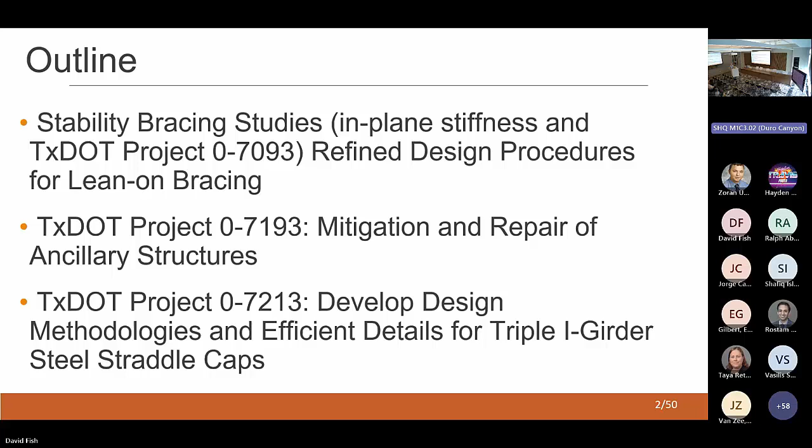And really want to commend David. This is an outstanding program today. I'm really kind of excited about a lot of it. Unfortunately, I've got to miss the rest of the morning because the university expects me to teach. They just don't have their priorities straight.

But anyway, so, okay, to talk a little bit, I'm going to talk first about some recent and ongoing studies we've got on stability bracing provisions. I really want to call out David Fish as well as Aiden, who's down here in the front, who've been heavily involved in both of these studies.

When we start to look at this, the upcoming 10th edition has got stability bracing provisions in it. Some of that may be new to some of you, but it's work that's been around for a very long time.

When we start talking about what we have to design for stability bracing, we find out that the stiffness is a function of 3 different components: the stiffness of our brace itself, like the cross frame, the in-plane stiffness, as well as cross-sectional distortion. And it's governed by the equations for springs in series, which, when you look at this, means the total system stiffness is smaller than the smallest of the individual components.

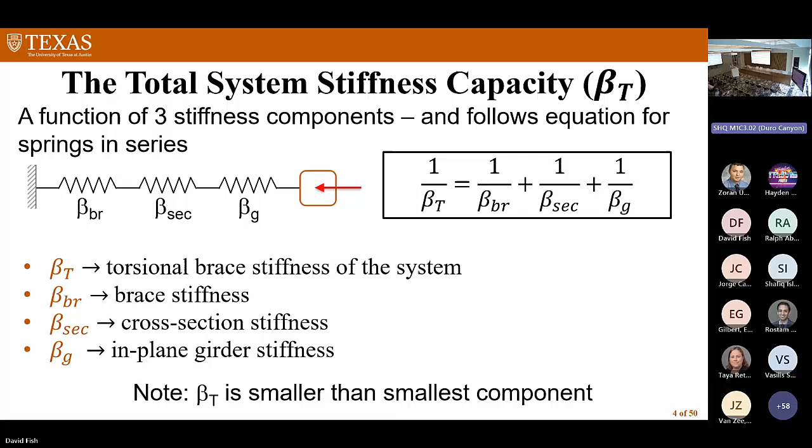So areas we've been working on a lot in the last few years are actually the stiffness of cross frames themselves, as well as the in-plane stiffness. We used to think we really knew what the in-plane or the brace stiffness was, and we did a study...

sponsored by TxDOT about maybe 7 or 8 years ago, I think, and we found out actually we don't know what we're doing very much there. We incorporated this thing we call an R factor that accounts for eccentric connections when we're using WTs or single angle type members. But generally, these stiffness equations work pretty well.

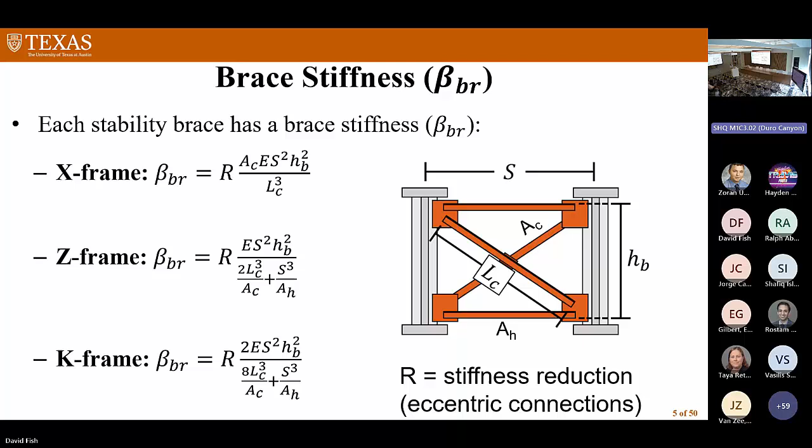The R factors that we have, we've kind of recommended values of a 35% reduction in the stiffness during construction. And then when we're evaluating fatigue and so on, we have about a 25% reduction. Those are things that have been in AASHTO Chapter 4 for some time. We are refining them a little bit.

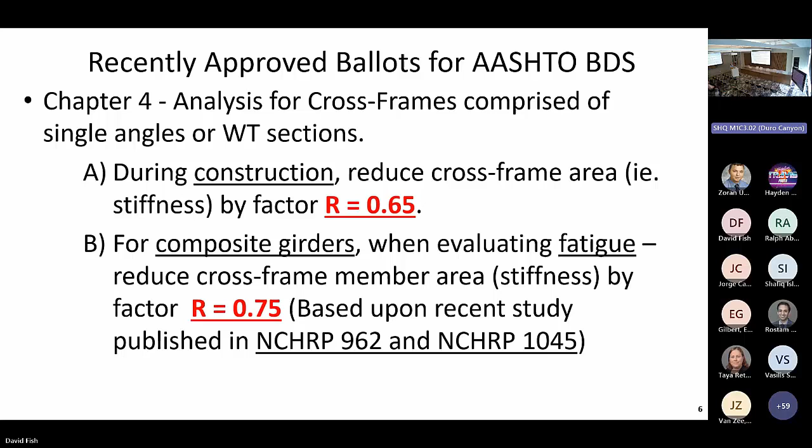Another thing we've been doing in this study with David and Aiden is understanding a lot more about the efficiency of some of these systems. It was a very detailed study we ended up doing.

We're recognizing cases that, a lot of times we go in, we've got a certain stiffness of a cross frame. So I've got the stiffness with a single cross frame — essentially what I have is a half a brace per girder. If I add another brace, another girder line, then I've got 2 braces, and what happens is I essentially go to 2/3 of a brace per girder. And then if I add another one, I get 3/4 of a brace per girder. If I get lots of girders, I go to 1 brace per girder.

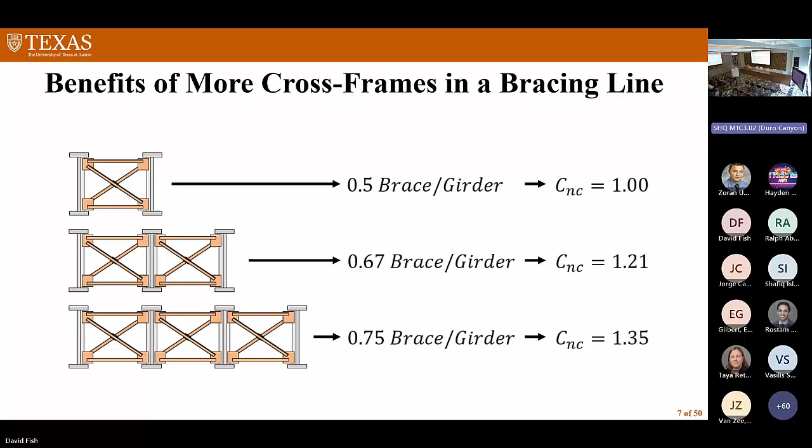So what happens is we're going to end up seeing that the CNC term here accounts for the improved efficiency of our different cross frame lines as we're adding some of those additional braces.

In the current edition of AASHTO—when I say current, I'm assuming the 10th edition is going to come out later this fall, we're hoping—we've got a term for beta G, which is the in-plane stiffness of our girders.

We discovered this back in the 1990s and came up with an equation. When we derived that expression, we did it for a single cross frame at mid-span, really for a twin girder system, and then expanded it to multiple girders. That recognized that the in-plane stiffness of the girders really impacts our behavior. What we're finding more recently is it can become unconservative in some cases as we get more bracing lines along the length. This is where David started doing some work when he came back and worked on his master's and got some nice expressions that we ended up coming up with.

Now, don't worry about the 10th edition provisions—they are conservative and work well, but we're going to be improving the behavior quite significantly in the 11th edition, which, at the rate we're going right now, is beyond about 5 years or something.

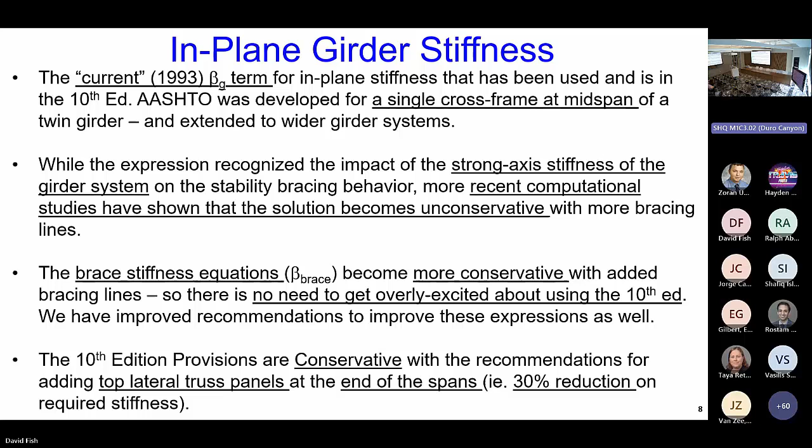Looking at what we did to come up with this, it was a very detailed and complicated study, because we had to isolate cross-frame stiffness from the in-plane stiffness. David ended up looking a lot at the in-plane stiffness effects through the system mode of buckling, and came up with some really nice solutions for those expressions.

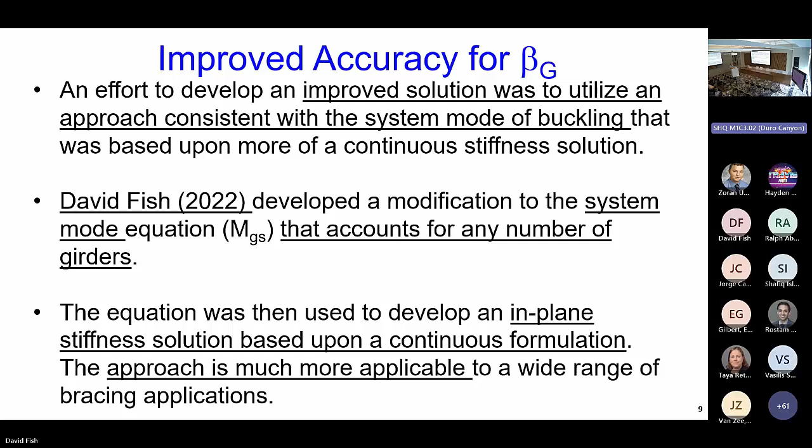So many of you are probably aware that back in 2008 or so, we ended up discovering the system mode, and we had to go tell all the bridges that this is a potential mode. We don't understand why we discovered this all of a sudden, and all of a sudden all these bridges started coming up with these problems.

This was the equation that we had derived back in 2008, and it was derived for a twin girder system. What David did is expand on this, and we've got some new terms in there that allow you to accurately predict the system buckling mode for systems with 2 girders, 3 girders, or 10 girders.

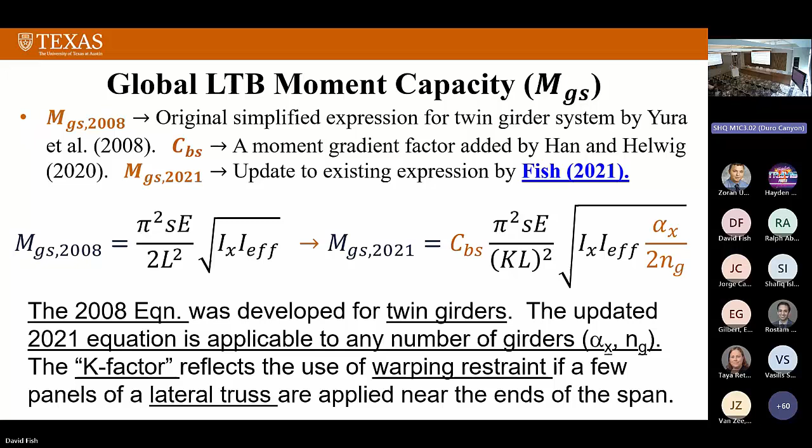Looking at that, we think it'll actually have a very significant improvement on what we can do from a design perspective. The other thing we end up doing is recognizing that the in-plane stiffness is closely tied to the system buckling mode.

So David went and derived this new equation shown right here, which has a lot more applicability to a wide range of problems and is relatively accurate. It's got the same things we have, like the alpha X here, that takes into account the warping stiffness of your girder system.

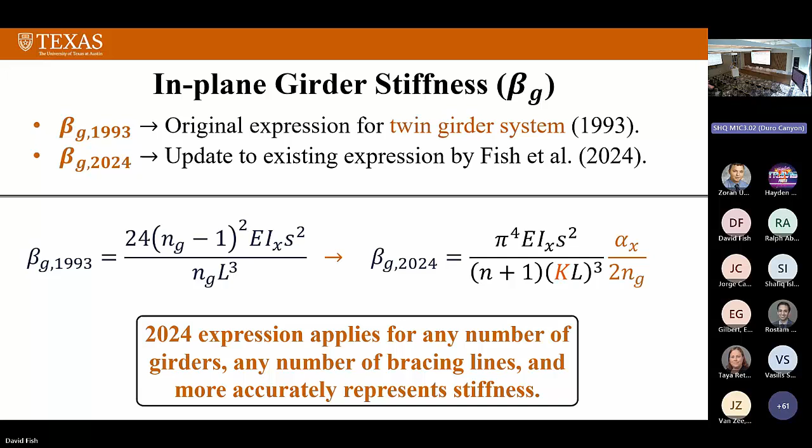Also, if you end up adding things like top flange lateral truss panels near the ends of your section, you can incorporate this K factor we've got here and use an effective length factor that captures the behavior much more accurately in our systems.

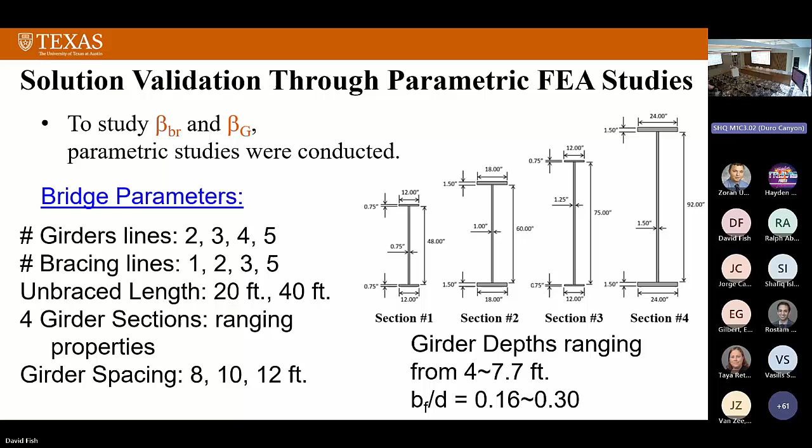We did some very significant parametric studies—this is what Hayden was working on, doing the FEA studies—lots and lots of systems, different girders, different numbers of girders, different geometries and so on, to really evaluate the accuracy of these provisions.

This shows a bit: if I look at the stiffness we end up getting on the vertical axis, normalized by what we call the ideal stiffness, versus the geometry—W over L of my bridge, the width versus the overall length—the equation we have from 1993 doesn't do a very good job. It looks like somebody took a shotgun and just shot at a target. Whereas the newer equation does a much, much better job—very significant improvements in accuracy from that expression.

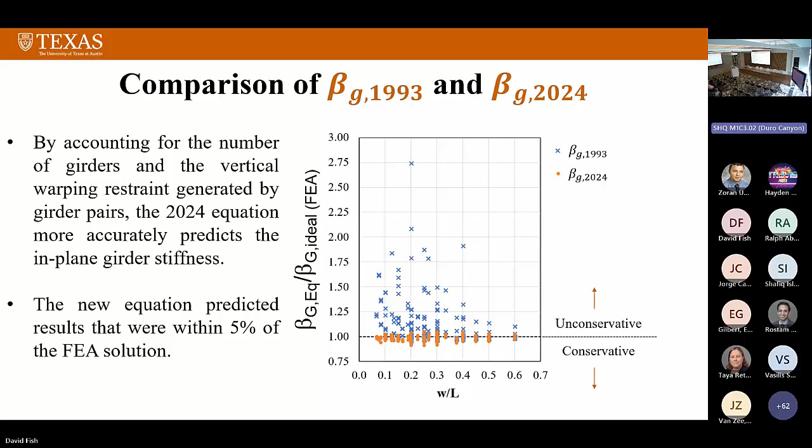Another study we're also working on involves those lateral trusses. We're not going to have you calculate a K, but say if you're using a couple panels of a lateral truss, you can design with a K factor of 0.7 or 0.75, something in that range.

That is a huge help because it's essentially on a term that's cubed. So if you use 0.7, you're looking at a very substantial improvement in behavior. And that 0.7 is in the denominator, so it's a big help for the overall stiffness of our system.

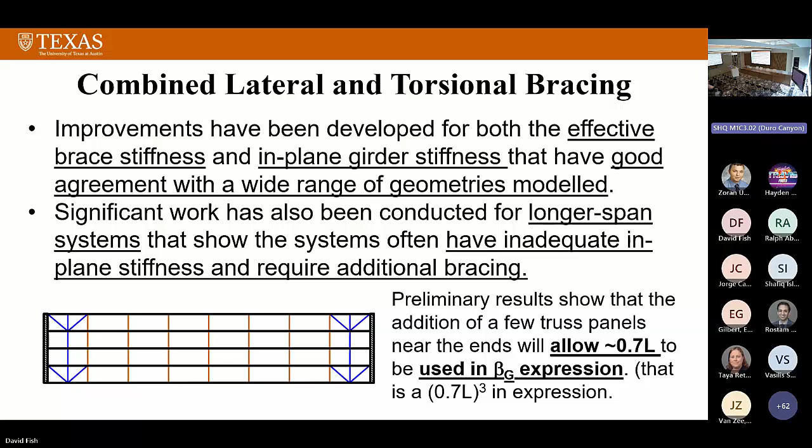Another study that actually finished last spring, but we're continuing to work on it. TxDOT found a few issues we had in our behavior. Hayden's been really going through that, doing a lot of work to refine our recommendations on lean-on bracing. I think we're all somewhat aware of the behavior of lean-on systems. We've used them in a few Texas bridges.

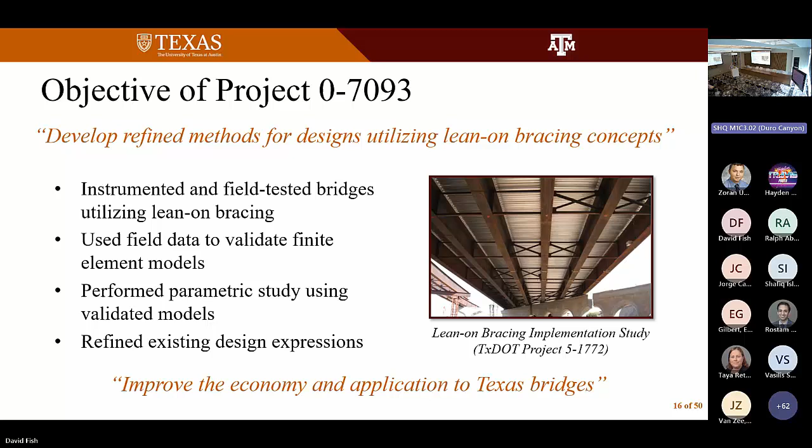I think I saw Michelle Ramage around here. She did some of her work on her master's back about 20 years ago. And we implemented this in a design she had done up in Lubbock on 3 different bridges, and really had some very good behavior on that. NSBA now has a new design guide on this that's out, with recommendations, and we're now refining our original behavior.

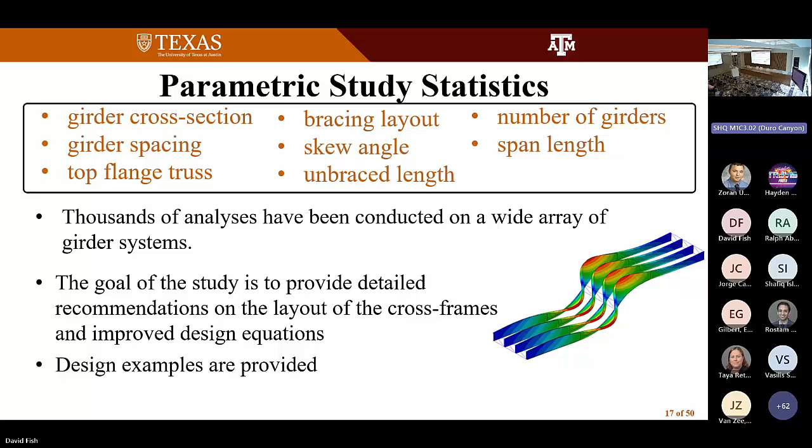So we're looking at some of the things we're studying, lots and lots of finite element analyses, parametric studies, looking at the wide range of systems that we end up having. The goal is to provide detailed recommendations to a designer so they don't have to be an expert in stability bracing to apply this material.

So we're kind of going through a lot of this and looking at it. We're looking at cases where you have normal layouts or skewed supports. TxDOT did that with a couple of bridges. Jamie Ferris was the design engineer for that. And when you get to skewed supports, the layout you use becomes something you need to understand the behavior on. So we're looking at a lot of different recommendations for systems with skewed supports.

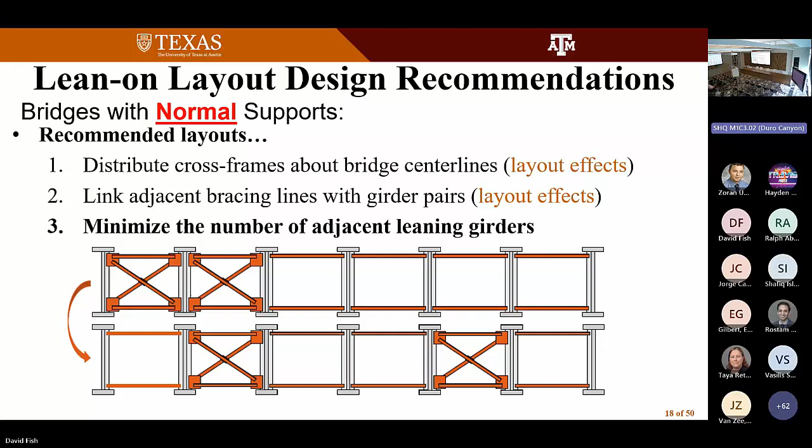If I have a choice between putting 2 cross frames over here versus spreading them out, you spread them out. It does a much better job on the overall behavior of the system.

Looking at different layouts, we're kind of recommending no fully lean-on girders. And then also at mid-span of the girders, we're always saying put a full line of cross frames. And what that does is it engages the girders much more.

No, this is not a timer, what's going on? It kind of is going on its own here. But anyway, those are some of the basic recommendations.

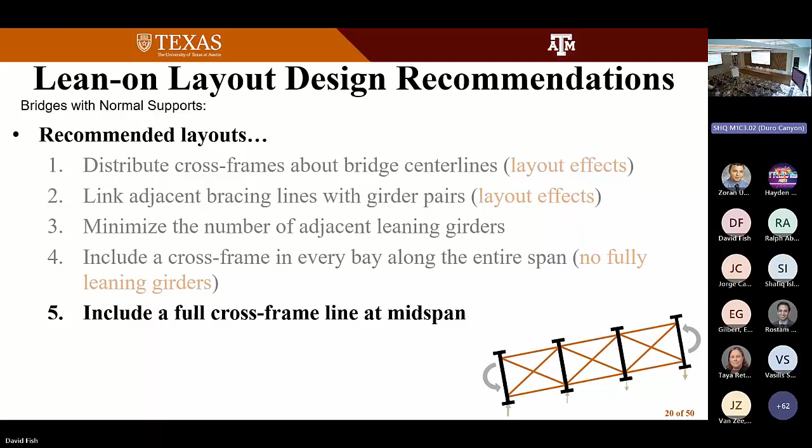And again, with these systems, we're looking at some of the contributions of top flange lateral trusses that you might put near the ends of our section.

We are getting some additional factors that come into play here. And David and Aiden, I keep telling them we're going to have to start wearing body armor if we make these things too complicated. Engineers getting frustrated with it here.

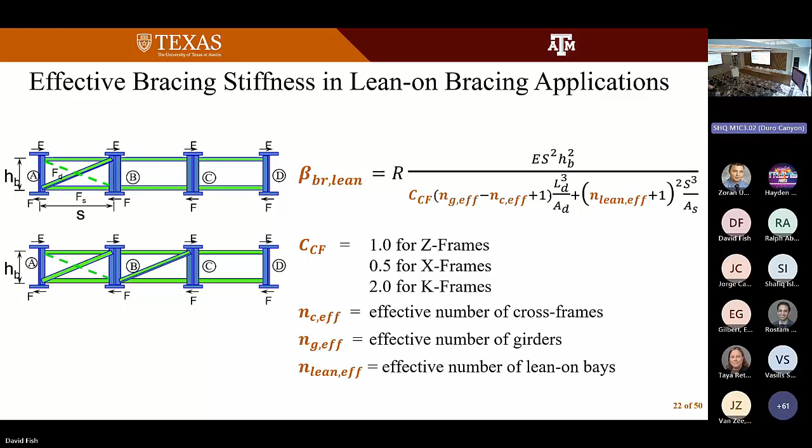But we do think we're getting a lot more accurate results, and we'll have a lot more things that engineers can actually see and very readily design with some of the lean-on principles, and get very accurate and efficient systems.

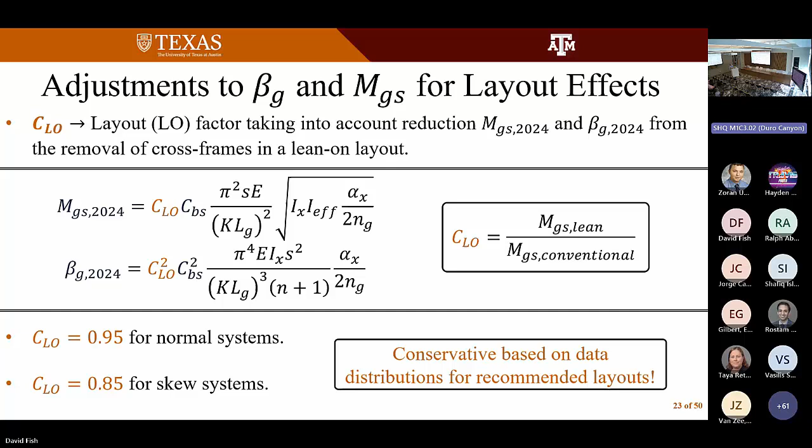Also working on this is a big improvement over what we did 20-some years ago, is the in-plane stiffness that we end up having. A lot of this is building off of the new value of beta G we're putting in. What we're recommending is a modification factor we call CLO that compares what we do with lean-on bracing to conventional bracing, essentially getting a much better estimate of the in-plane stiffness effects when we have lean-on layouts. So a lot of advances we think are coming to that.

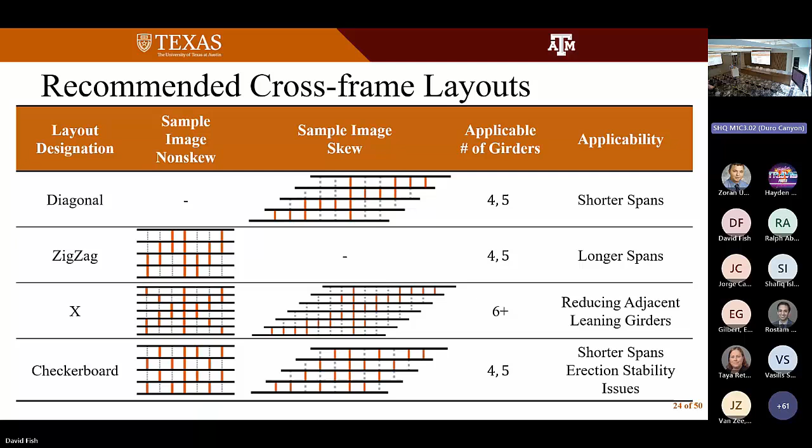And again, what we're also going to be doing is trying to recommend specific layouts so the designer can go in and see what's the best layout to actually have on our systems, going from cases with normal supports to skewed supports, and what the recommended layouts are as a function of the geometry of our systems.

Another thing, I may have shown this last time, but I want to emphasize it. A lot of times designers will come in with a heavily skewed system and put cross frames in here. Don't put this cross frame framing right into a support on a heavily skewed system. You don't have to call that lean-on, that's just good engineering, okay? This is a really difficult cross frame to get in.

If you leave it out, it actually has no impact on the stability of the system. So we're recommending that you can reduce up to 10% of your cross frames in a given span, and you don't have to do anything different than what you would normally do. It just results in systems that are a lot easier to erect and to put those cross frames in.

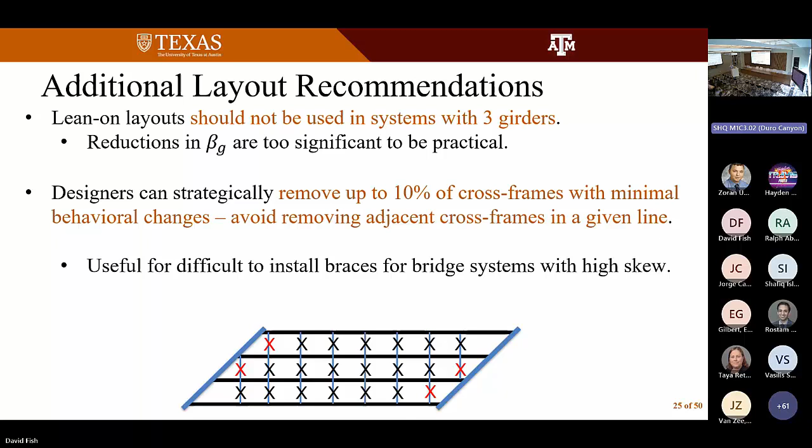Okay, so another project that we have ongoing - and I always kind of mention this gaudy color scheme here where we're mixing maroon with burnt orange. We've done this on a number of projects lately. Stefan is on this project leading the A&M side.

This is a study looking at ancillary structures and trying to look at crack issues that you may have with the welds - first assessing the cracks and trying to develop some potential repair techniques for when we have issues where we might have problems.

A lot of students working on this and postdocs. Jung Hoon is a PhD student from UT. Got Mushtaba and Aiden are postdocs working on the study. At Texas A&M, the main student is Hongil Kim, and again, Stefan is leading this as the faculty member at A&M.

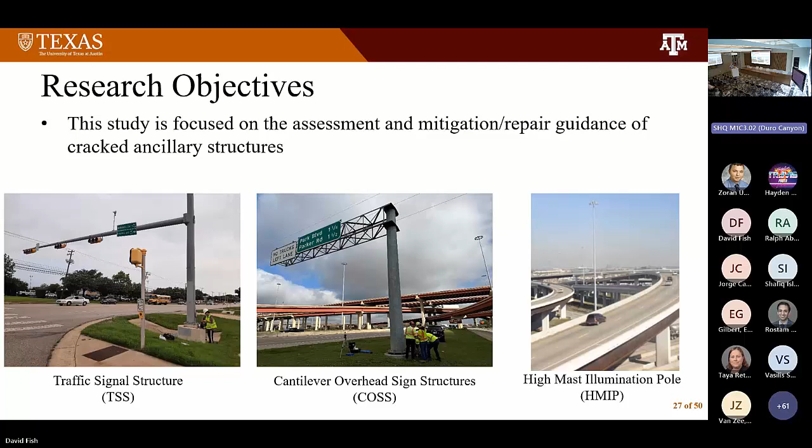Doing a lot of stuff on this - it's a pretty wide scope. Traffic signal structures, cantilever overhead sign structures, as well as high mast illumination poles, and specifically looking at the weld between the shaft and the base plate of our section.

When we start looking at what we're doing on this, we found this out about 20 years ago - this galvanizing process that we use to extend the service life of these structures. A lot of times when you do that galvanizing, you have this thick base plate with a relatively thin pole shaft. When you dip that in the galvanizing system, there's a differential expansion, and it leads to cracking in those welds.

So before this even hits the field, a lot of times they have cracks in them. Lately, what you can do on these is they actually are inspected after that, and the welds are repaired, but we've got a lot of poles out there that might still have some cracks in them.

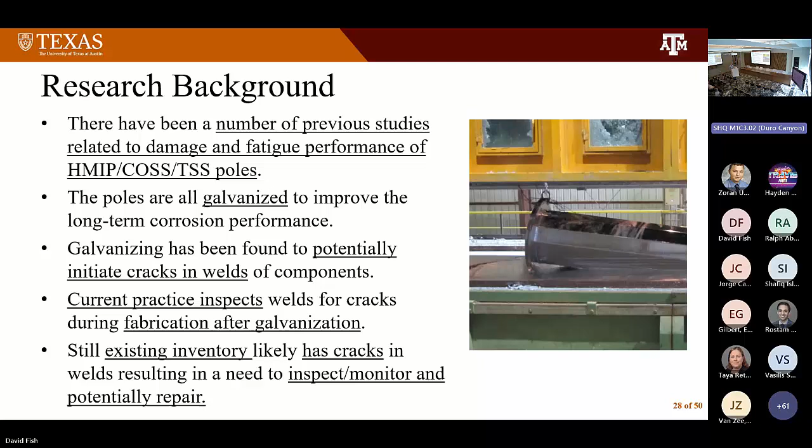So what we want to do is go out and first assess the cracking level, then go through and look at this from a behavioral perspective of when do we need to repair those welds, when do we maybe need to replace the pole, when do we just need to monitor it. Those are some of the things we want to try to look at.

We've done a lot of work, mainly on the high mast illumination pole side at UT Austin on this - done lots of fatigue studies on these systems, kind of going and inducing the fatigue crack and looking at the performance of them.

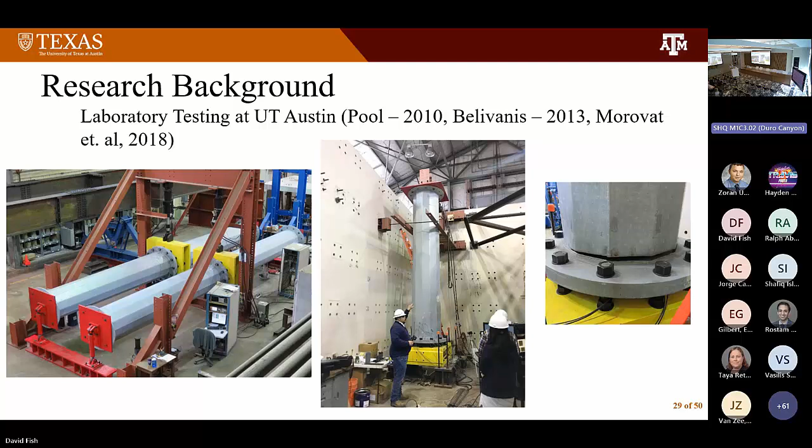We've also done some ultimate strength tests over here, pushing laterally on some of those systems. We're going to be using similar test setups in this study.

The other thing we want to do is come in and say, when we do have a crack, how can we repair that? So we detect the crack, and then what's the repair process that we need to use on some of those systems.

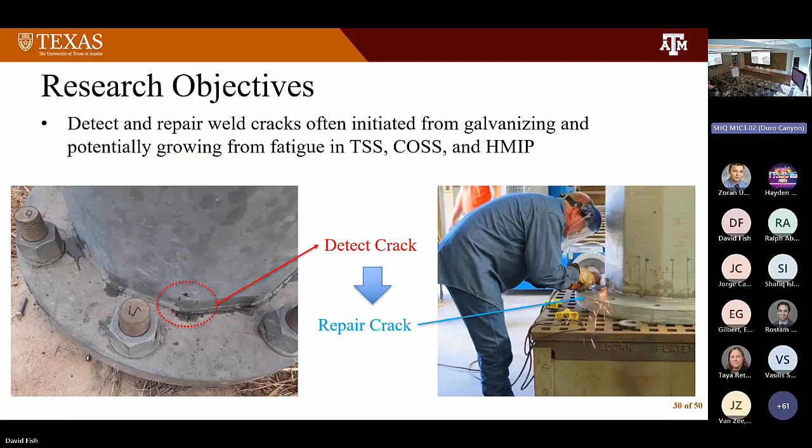So again, what this started with was first a field assessment of different cantilevers, overhead sign structures, high mast illumination poles, and traffic signal structures throughout Texas.

The way we're assessing that is using phased array ultrasonic testing. We have a couple of experts on our team. Stefan's very strong with this.

Faculty member Salvatore Salamone at University of Texas is also very strong in this, and Jung Hoon and Hong Gil also are experts on it. I'm not so much of an expert on it.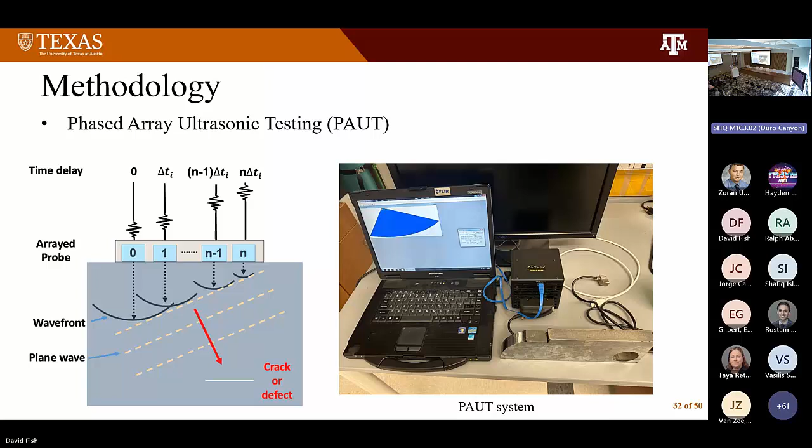But what this allows us to do is get in quickly and assess and locate the cracks, and essentially look at the depth of crack and the sizes of those cracks on our pole systems.

To start out this first year, we went to some of the major metropolitan areas - I call Bryan a major metropolitan area, so there we go - around the state, and looked at poles in those areas and assessed the cracking.

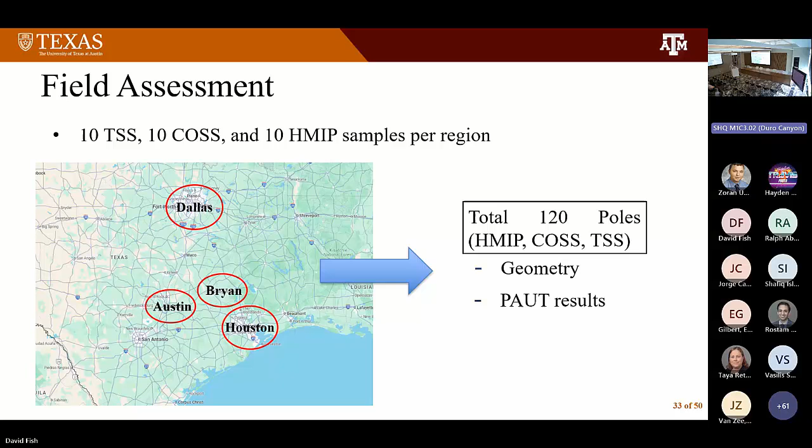In each of these different jurisdictions, we went and found 10 of each of the high mast, cantilever overhead sign structures, and traffic signal structures - that's 120 samples. We went through and really tried to look at the geometry as well as the location of the cracks on the different systems.

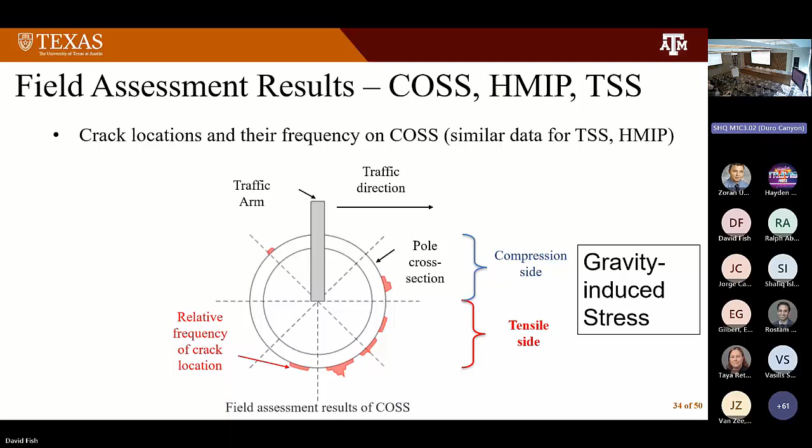We're trying to understand a little bit about the nature of the cracking that might come in these systems, as well as looking at our ability to detect those cracks. We're also in the process of doing laboratory experiments on all 3 different sign structures or ancillary structures that we end up having.

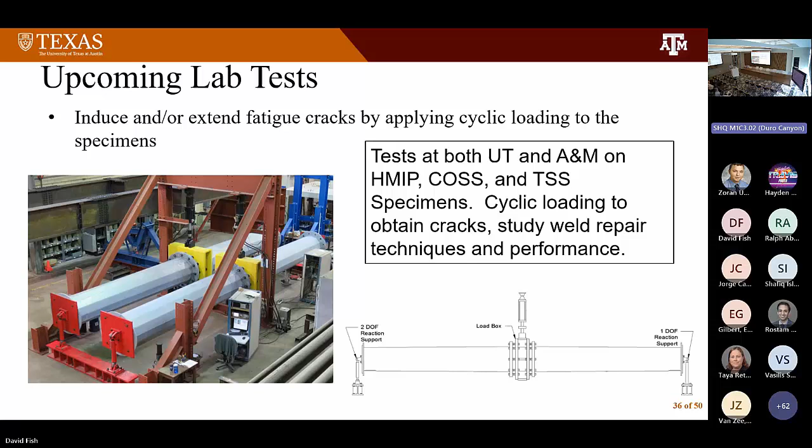UT is going to be doing the tests on the high mast illumination poles and the cantilever overhead sign structures, while A&M is doing the tests on the traffic signal structure type systems. At UT, we're going to have a setup very similar to what we've done in our past studies for both the cantilever overhead sign structures and the high mast illumination poles. We're in the process right now of putting those structures up.

As far as the race to the moon goes, A&M has actually already got a setup where they've kind of gotten it up and started putting some cycles on this.

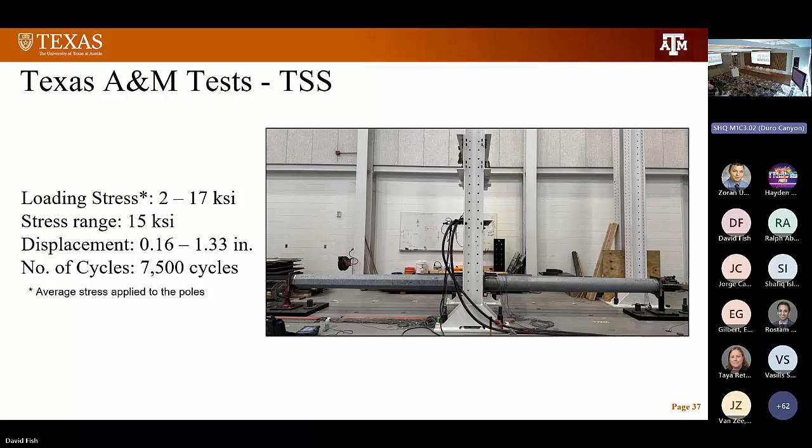So what we're essentially doing is pulling up on this section - kind of makes you dizzy here. You can see essentially as we're cycling this up and down, it's putting tension in the upper portion as we're pulling up on that pole.

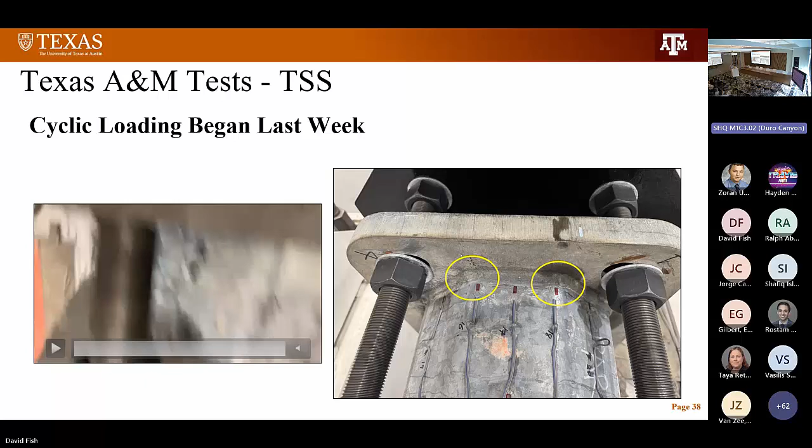That allows us to grow that crack and assess, using the phased array, how well we can track that crack growth. We'll get it to a certain level of damage, then come in and evaluate different weld repair techniques for some of those systems.

Where we're at on that, we've completed the field assessments. We're in the laboratory now. We've got high mast illumination poles as well as traffic signal structures that we're going to be testing. We were fortunate enough to get a lot of them from the field.

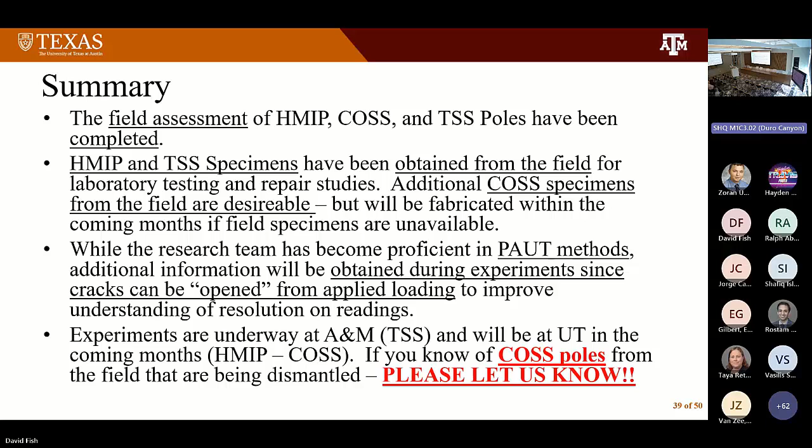We're also having a traffic signal pole actually fabricated at Valmont - that should be done around January or so. I'll mention here, we're probably going to have some cantilever overhead sign structure specimens fabricated. If you know of some that need to be taken down, we'd love to get them. Anything we can get from the field with existing damage, as well as the geometry, we would love to have. So if you find anything in the next few months, please let us know.

The last project I want to talk about just started here at UT Austin on the Triple-Girder steel straddle cap systems. This is a nice lead-in because we're talking a lot about that this afternoon. The main student on this is Baran Koyak, and we also have Aiden and Mushtaba, 2 postdocs also working on this study. This is a joint study with Texas Tech.

Sung-Young Park, who was a postdoc here at UT a few years ago, started a position at Texas Tech, and he and Srijan, a PhD student at Texas Tech, are also working on this study.

This builds off a project, TxDOT Project 7012, which focused on taking welded or conventional box caps and trying to come up with improved details that would show some redundancy. We finished this project, and we think we came up with some nice recommendations that allowed this to be a redundant system. It had very good performance in the laboratory.

We did a lot of FEA work on it. The Triple-Girder now provides us another great option that's got a redundant system.

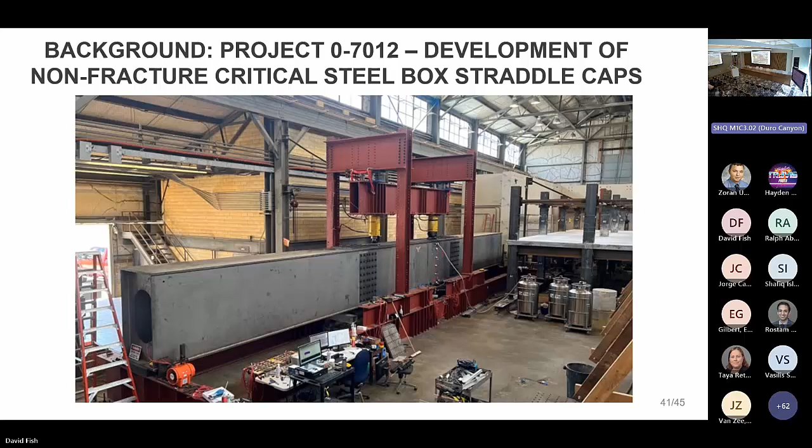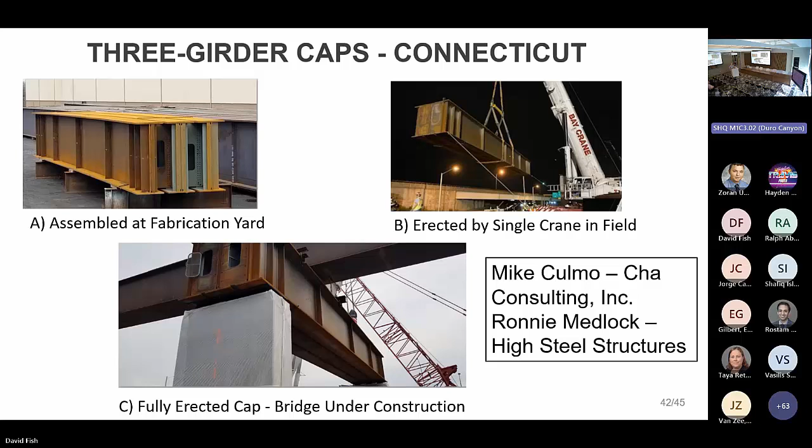So to get into it, we look at the behavior we're trying to address here. I think a lot of us are aware of the Triple-Girder cap that was done up in Connecticut a few years ago. Here in Texas, we've had a lot of them designed in Austin and San Antonio. They're seeing a lot more usage with these systems. The 3-girder system is redundant, a great option for what we're doing.

Our goal here is to try to investigate some improved detailing that may end up improving the performance. We do have an industry advisory group that we're just starting to kick off with, and we want to bounce ideas off of them so we don't end up doing something stupid and find out later that it can't be built or there's a better way to do it. So we're trying to get that feedback right now.

Our goal is to look at the Triple-Girder systems. Like a lot of them, including the one in Connecticut, they've been done with what we call a stack geometry, where the girders are on top of the system and essentially the load is coming directly on top of our system there.

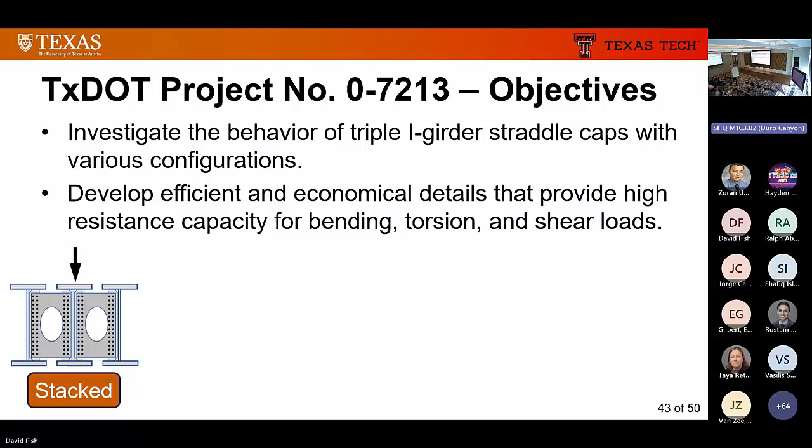We also want to look at cases where we might have a corbelled geometry, where the loads may be coming in on either side with a bracketed type system, as well as an integral option on this system. So looking at the different geometries that we might end up having.

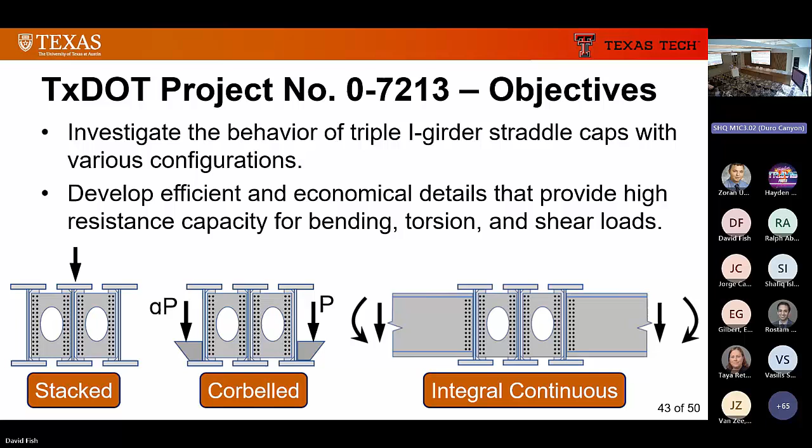When we have the corbelled or even the integral continuous system, those systems can end up getting some torque due to differential reactions on either side of that system. So all of a sudden the torsional stiffness of this cap becomes a lot more important.

When we look at it, a closed box shape is ideal for torsion, because the torsional stiffness of a closed shape is thousands of times larger than a comparable I-shaped type section or an open shape.

If we get to the triple I-girder system, I'm going to call it a pseudo-open, or you could call it a pseudo-closed type system. Even though it's 3 individual girders, we tend to use batten plates and so on to engage those adjacent girders, and we can get it to behave a lot more like a closed system, which can really be very beneficial for torsional behavior.

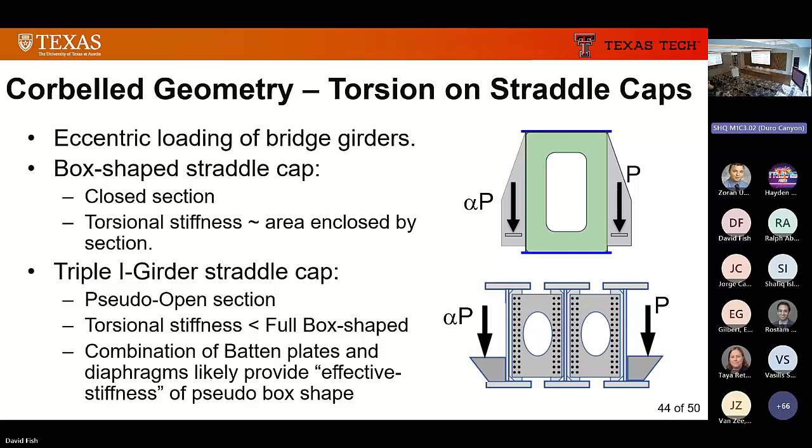So what I'm talking about is if I look at a plan view of a corbelled geometry where I've got maybe a different number of girders coming in, different span girders, but I get torsion on there - just looking at batten plates near the ends of the section, it kind of engages those boxes to act a lot like what we do with tub girders.

Quasi-closed type systems. In the upcoming AASHTO, it allows you, like on straight tubs, to not put a top lateral truss all along the length. It's mainly the ends of the section where they're the most efficient.

We think we can get a similar behavior as you start getting into some of the battens and so on that tie these 3 girders together, really enhancing the torsional stiffness of our system.

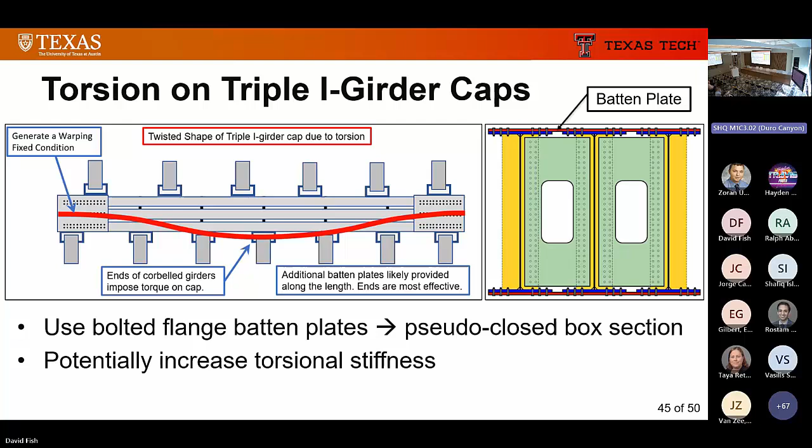Some of the different details we're looking at: if we move the webs out a little bit on the outside 2 girders potentially, now you have a bigger cell in there. And if that's kind of a pseudo-closed system, the torsional stiffness is a function of the area of that cell, so it can improve it potentially from a torsional behavior standpoint.

I think it'll also improve the aesthetics - now it starts to look more like a box type section. You don't have to move it all the way out to the edge, but anything you do there will make it a little bit more like a box section. So there's some advantages both structurally, and I think even aesthetically there might be some major advantages.

When we start to look at this system, we do have to be careful with local buckling behavior because we have a bigger overhang there. Potentially you may have some local buckling that we control with B/T ratios.

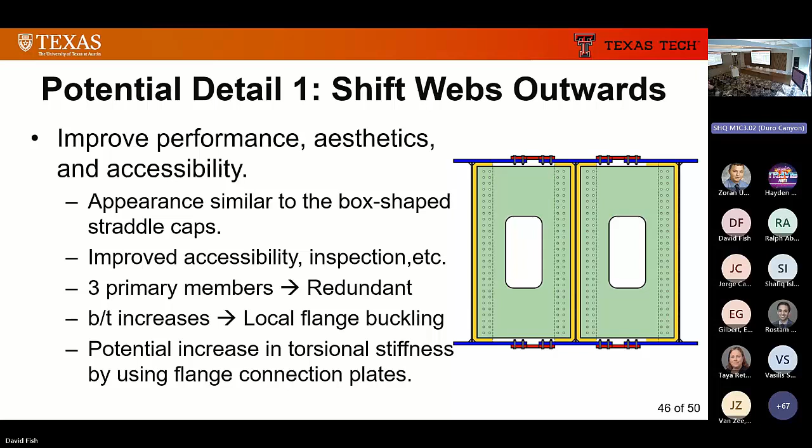So when we look at some other things we've considered doing instead of using batten plates - and the fabricators may tell us that's a dumb idea, but we want to look at it - with 3 girders, maybe what we do is make the interior girder 2-3 inches deeper and actually just overlap the flanges.

Then you could put bolts wherever you want - you don't have any batten plates. It's just a possible option we want to look at. There will be geometries where maybe that doesn't work very well, but there may be geometries where it works very well and isn't that difficult. We want to actually try to look at that.

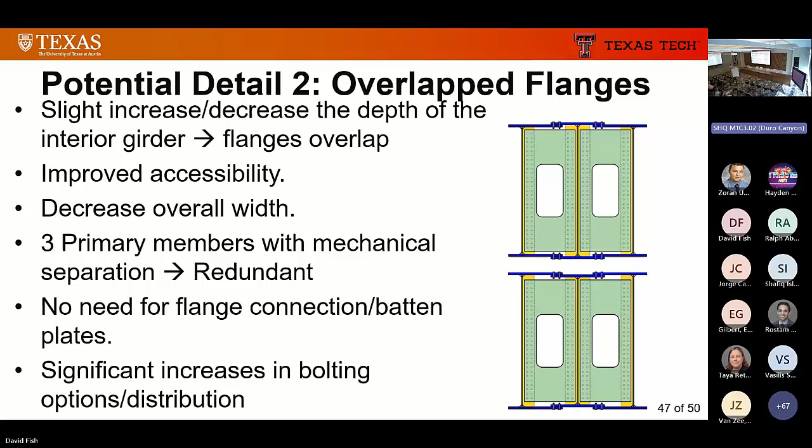It gives us a lot of different bolting options as well - you don't have to put bolts at a close spacing all along the length. You're just going to engage them at various locations along the length and try to improve the local buckling behavior, but it may also give us a little bit of improved performance.

Whenever we start a research project, we always do some background studies and try to get the students up to speed on finite element analyses. Our students have really jumped ahead on this - we've already got some 3D FEAs. We started with the geometry of the Connecticut 3-girder cap.

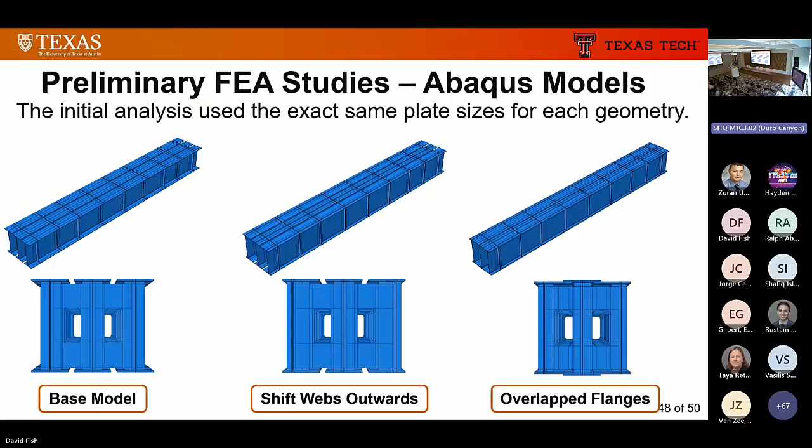Looking at the base model, it has 3 equal girders. We're also looking at cases where we just shift those webs outwards, and then cases where we overlap our sections. In design, you probably wouldn't use the same flange thicknesses, but for the purpose of comparing apples to apples, we use the same geometry for each of them just to look at the overall behavior of these systems.

So starting with a case where we've got our girder systems side by side with a stack type geometry, so there's no torsion applied to this system. We look at the behavior of using the conventional case where we've got 3 equal girders. We get a behavior that looks like this, and this was actually controlled. The limit here was local buckling of the top flange of this section.

Now when we move the webs outwards, we didn't get as high because we had more of a local buckling problem, because we've got this large overhang on the inside. Now when we use the case where we overlap the flanges, all of a sudden the plate buckling coefficient goes through the roof. So one of the nice things is it does kind of get rid of that local buckling behavior—I shouldn't say get rid of it, it enhances it very substantially. So we think there can be some benefits to this.

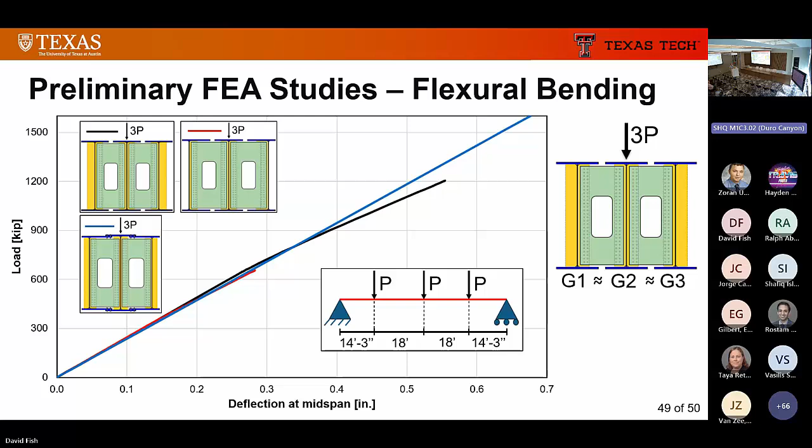We've also done some studies looking at cases with an eccentric load on here and looking at combined bending and torsion. When we look at this, we look at the behavior individually of these 3 individual girders, and they do behave a little bit differently.

For example, if we look at the centered flanges, you get these deformations where each girder deforms a little bit differently. As you go to the case where we offset the webs, you get the same behavior but a little bit lower local buckling performance. When we go to the overlap flanges, it behaved more as a unit, and again there was no local buckling, at least at the load levels we were looking at.

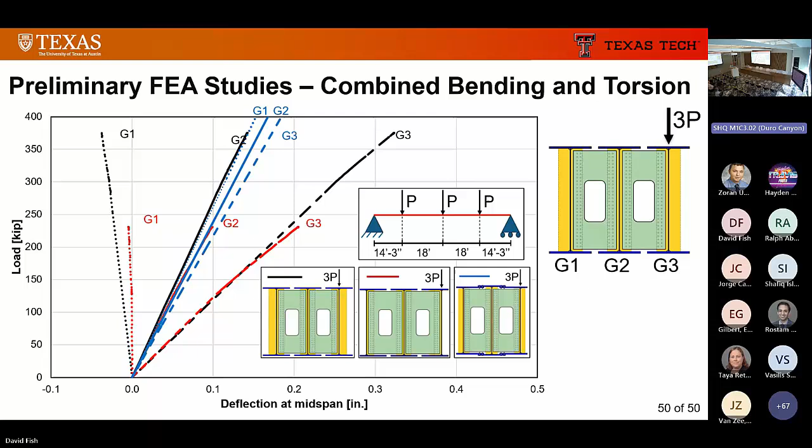So anyway, we still want to work on this, obviously. These are just preliminary analyses, but we think we'll maybe learn a lot about potential detailing that we may end up improving, and we'll try to see how that actually works. And I decided not to do a summary slide, so I wasn't talking about everything I talked about.

So I don't know if there's time for a question or two.

Question: when you have a single point load on a girder, do you understand how it's distributing the load to the other girders, the adjacent ones? So the question is how the load is distributed to the other girders when we have a point load on it. Generally what happens is it's distributed through the diaphragm. There are internal diaphragms that tie these three girders together, and that's how it tends to engage these.

One question that's kind of come up on the three girder case is how many bearings do I need under the ends of it? I'm of the opinion you could get by with just one on either side and it would be fine. But there's this question—do I need two or do I need three? We're getting kind of crazy, asking questions because we can.

Two is the maximum you need under each side. I think you could actually get by with one. But the question on that is, what if I fail one girder? If it doesn't have a bearing under it, how am I going to engage these systems? You find out once you get past the first diaphragm, even if you've fractured it, it engages all three girders. We saw the same thing in that last study, 7012, on the redundant box sections—you could get a failure in one of the webs on the side, and 5-6 feet away, you fully engage the cross section again. But it all happens through the internal diaphragms that are spaced along the length with access holes through them and so on.